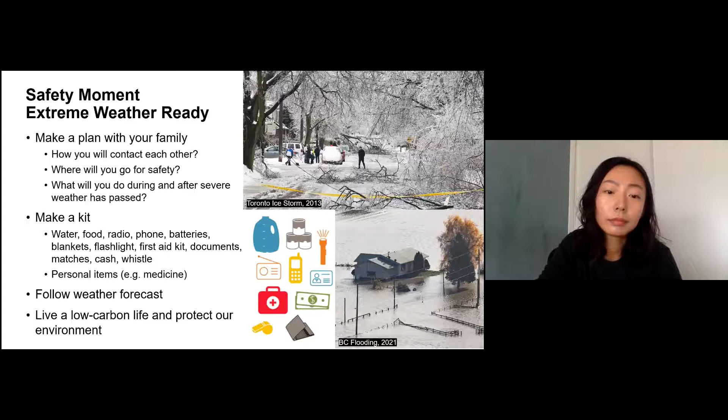Thanks, Yunfei. We also like to do inclusion, diversity, and equity moments at HDR. Today I want to quickly talk about pronouns, and you'll see that we are featuring them in the presentation. Pronouns are words that refer to either the people talking or someone or something being talked about, and gender pronouns specifically refer to people you are talking about. Why are these important? Pronouns are one of the ways we portray our identities, and you can't always tell what someone's gender pronouns are just by looking at them. So when someone asks you to use their gender pronouns, they're asking you to respect their identity. Ultimately, knowing and using someone's gender pronouns is a positive way to support the person you're engaging with.

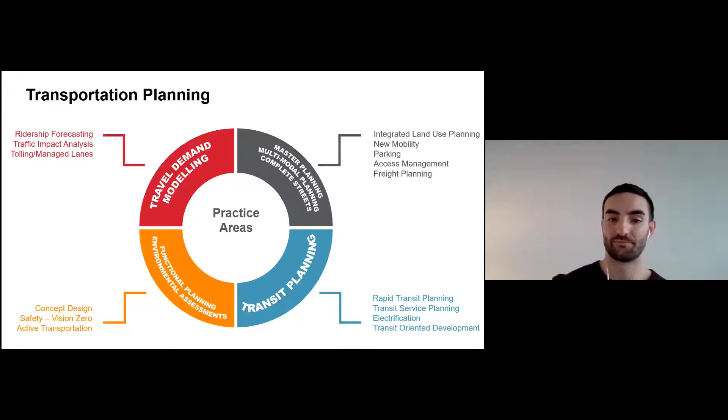Before we go into the four areas Nico just mentioned, this is really a golden era, at least the way we see it, for transportation planning, or just the transportation industry, and there are a couple of reasons. There's a lot of new technology happening — you can see e-scooters on the street, electric vehicles, autonomous vehicles, a lot of new areas of research. And I mentioned climate change earlier — a lot of the projects we do are looking at infrastructure resiliency, and I'm sure there's going to be a huge need for that. Also, the entire GTA region is growing really fast.

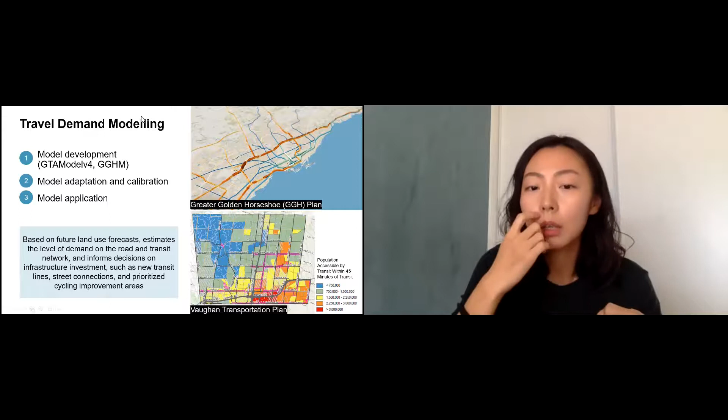Once we have a good understanding of the road and transit network's demand, we use that information to inform decisions—whether we want road widening projects, a new transit line, or to improve transit service on certain corridors. That then provides inputs to these improvements.

One thing I want to point out is when we look at the way we use models, we have to have critical thinking to understand what these demands actually mean. So if you look at a road network and the volume over capacity is over 1, which means it's congested, when we look at these numbers and look at improvements, we do not necessarily just say this will trigger widening projects. We can look at ways to improve transit, or prioritize some cycling facilities to offload the projected demand on the network.

Here are two applications of the model, shown in the pictures on the right. The first one is for the Golden Horseshoe plan, the GGH plan our team is working on and trying to wrap up. We used the province's GGH model and looked at the demand. What's shown on screen is the demand on the rapid transit network and also the highway network.

The bottom right is the Vaughan Transportation Plan, which I'll talk about in some later slides. For this one, we looked at travel times projected in the GTA model. The more blue areas are areas with poor transit accessibility, and the redder areas are zones with good transit accessibility.

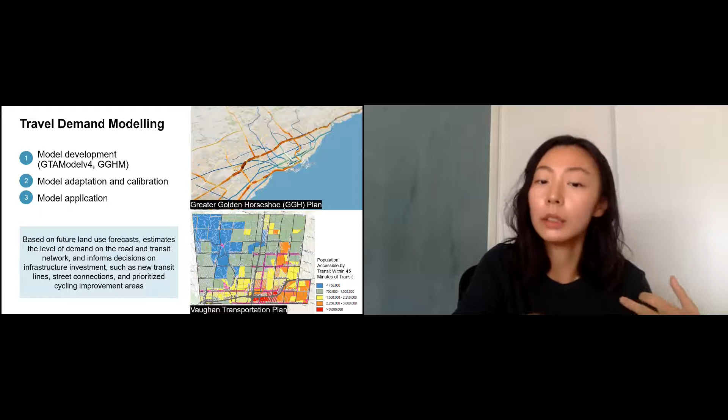So when we looked at that, we identified neighborhoods that may have poor accessibility to jobs, and some of the improvements we made based on this model projection were to improve local connections, either by improving transit headways or adding new transit services on the network.

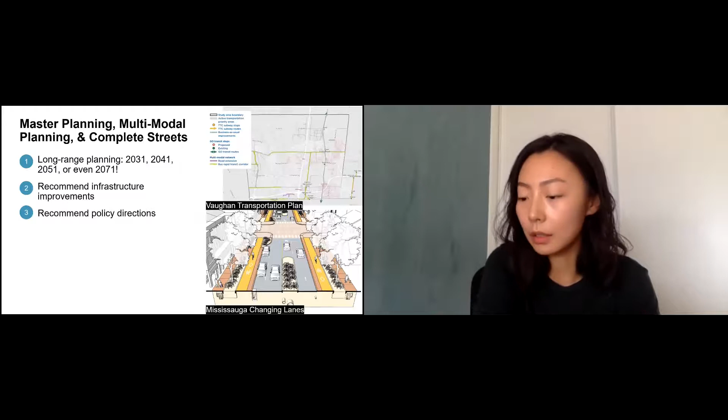So the first example I'm going to talk about is the Vaughan Transportation Plan, which is Vaughan's Transportation Master Plan. It's a strategic policy document that provides a framework and recommendations to guide future transportation-related studies, projects, initiatives, and decisions. There are three major components: first, establishing a vision with clear goals and objectives for how we want the city's transportation network to move in the future, in the 2041, 2051 horizon. Then we looked at existing conditions and projected future conditions, and based on that, we have a list of recommendations, actions, and policy directions.

So here are some samples of what we would recommend coming out of this transportation master plan. We proposed alternative solutions that can improve the city's network. For any transportation study, we usually have a business-as-usual network that looks at plans already in place, either city, region, or provincial, and look at what happens if we just keep going that way. Based on that, we provided new improvements in alternatives 1, 2, and 3. Alternative 1 is only road improvements, alternative 2 is only active transportation - walking, cycling, and transit improvements - and alternative 3 is a multi-modal alternative with a bit of road, AT, and transit improvements.

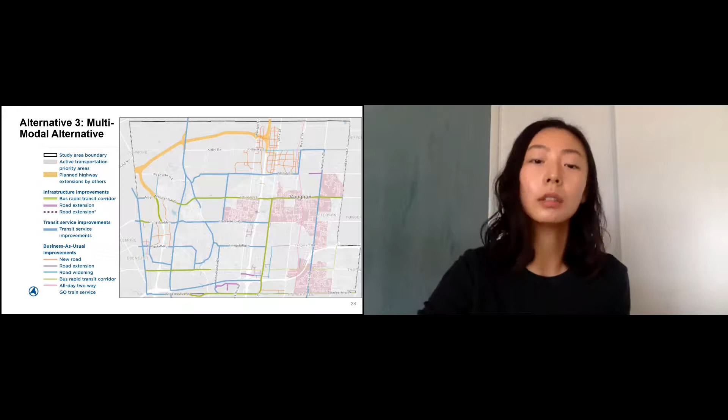Next slide, please. Policy directions is another big part of these transportation master plan projects. I have 3 examples on the screen that I personally find pretty interesting for our project. We're doing a lot more, but this gives you some ideas of what will come out of these transportation master plan projects.

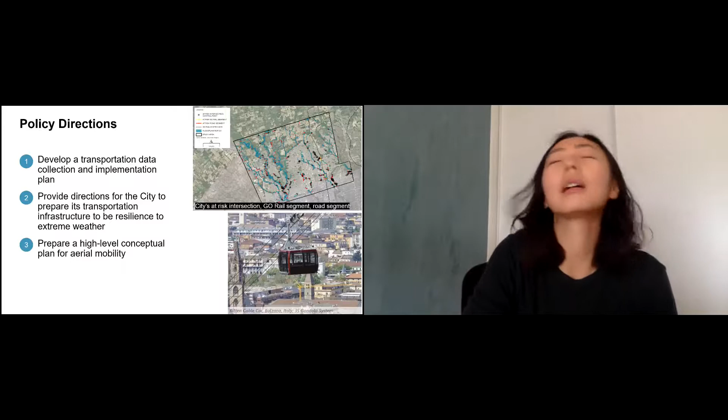The first one is we're developing a transportation data collection and implementation plan for the city. The city of Vaughan does not currently have an official data collection program. Based on our review and interviews with neighboring municipalities, we're providing recommendations on what areas you may want to look at and what technologies you may want to use for your data collection program.

The second one is a climate change resiliency paper we're working on. The map in the top right corner shows where we conducted weather and rainfall forecasts and floodplain projections for the future, in the 2051 or 2080 horizon. We looked at the city's infrastructure, like intersections, GO rails, or road segments that may be at risk, and provided recommendations to retrofit them now or design alternative solutions.

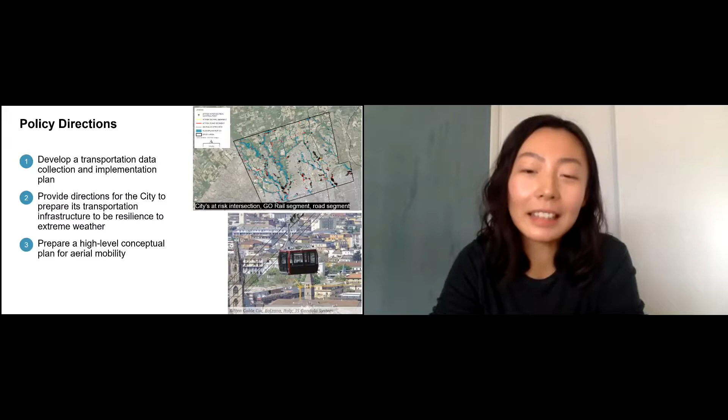In the future, when we propose any infrastructure at these potentially at-risk locations, climate change resilient design should be considered. The last one is pretty interesting: we're looking at a very high level conceptual plan for aerial mobility, potentially a gondola system. I want to caveat that this is a very high level conceptual design. When we prepared the proposal, we thought the city of Vaughan might be interested, and they were, so we're looking at this for a corridor of the city.

Next slide, please. The next example, or kind of project we do, is a complete street study. This one I have titled Mississauga Changing Lanes, which is how they refer to their complete street study, but the concept applies to all municipalities. The bottom line is, how can we design our streets so they're safe for users of all ages and abilities?

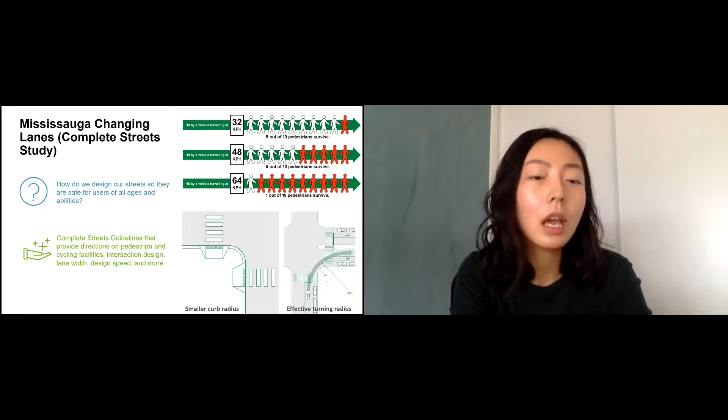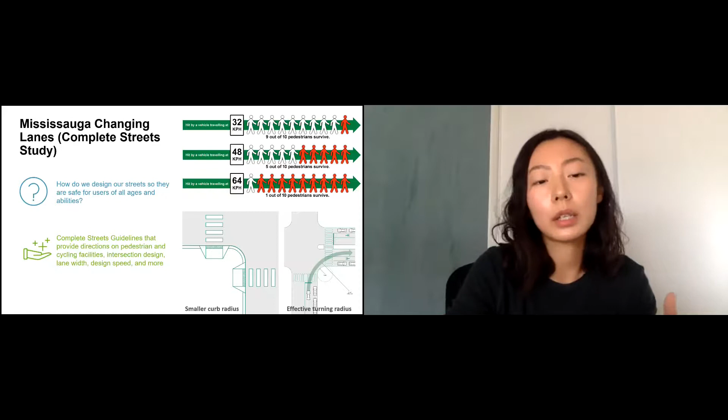This means people who walk, people on bikes, and children or seniors—all road users. For complete streets guidelines, we provide direction on how to design elements such as pedestrian and cycling infrastructure, intersection design, lane width recommendations, and design speed recommendations to help ensure infrastructure is safe for everyone.

Some examples of what we may do: the top right corner looks at if a vehicle is traveling at a certain speed and hits a pedestrian, what's the chance the pedestrian survives? At around 30 kilometers per hour, most pedestrians will survive. But if hit at 60 kilometers per hour, only 1 out of 10 pedestrians will survive.

So for a lot of these complete street studies, we're recommending the city reduce their design speed, how they design streets to make vehicles slow down, or change traffic calming measures or lane width elements to again make them slow down.

The bottom right shows 2 images on curb design. This is all related to making vehicles slow down and having pedestrians cross with less distance. Smaller curb radii force trucks or vehicles to slow down and look at people crossing the street. Another technique we recommend is using effective turning radius.

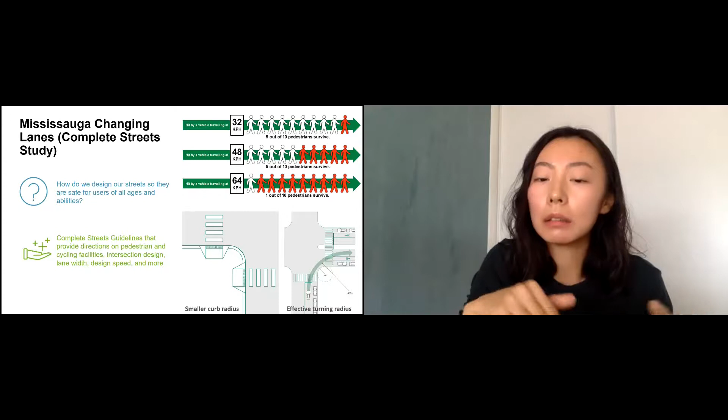Imagine a large vehicle like a big truck—it needs a bigger corner radius to make that turn. Instead of making the corner really wide, we allow for an effective turning radius movement, meaning they can turn not to the curb line but to the middle line in that same direction. This allows for a bigger curve while still maintaining the small curb radii that ensures the safety of pedestrians or vulnerable users.

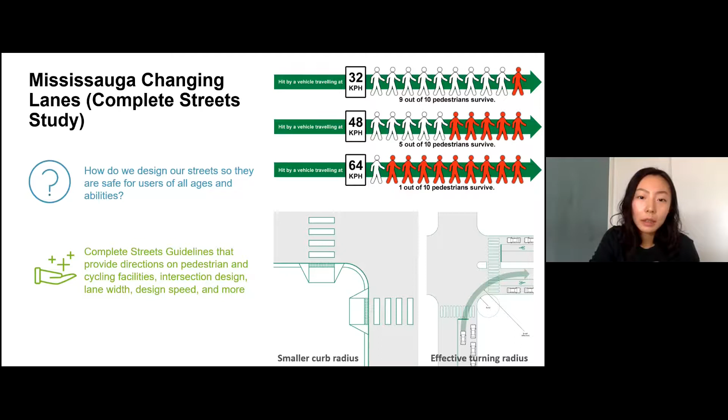So with that, I think that's the end of my part, and I'll pass it on to Nico to talk about transit planning. Thanks, Yunfei.

Just before I start this section, I want to note that even though we're categorizing these areas into 4 practice areas, they're so intertwined that every project has a component of one of them within it. So it's hard to talk about them in isolation.

Transit planning is a really broad umbrella that includes a number of different sub areas. Within transit planning, some of the things we do are related to service delivery, which includes scheduling. A lot of the work I do personally is around infrastructure planning of transit projects.

We also help clients develop plans for their fleet and how they can transition it. For example, right now a lot of clients are looking to transition their bus fleets to be completely emissions free, so looking at electrifying potentially.

We also do a lot of marketing and communication services. For example, when a region wants to introduce a bus rapid transit system that's completely new to the public, there needs to be a concerted effort to market, educate, and communicate what the benefits of that BRT system are going to be. So we can do that as well.

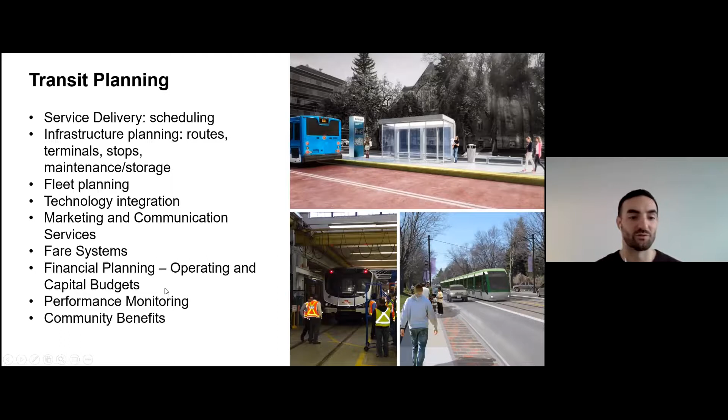One of the biggest projects that HDR currently has is the Ontario line. I wanted to quickly talk about our involvement from the early days of the project, where it all came from - the relief line, as it was referred to previously. I think it's been contemplated since 1910, so this project has been thought of for quite some time, but obviously it's 2021 and we're still on the road to getting it built.

HDR really got involved back before 2012, when we completed the downtown rapid transit expansion study for the city of Toronto. What that looked at was what is needed to solve the congestion issues we were seeing on the Yonge line, and also help serve some of the shoulder areas of downtown that weren't currently being served adequately by rapid transit.

Through that study, a number of different routes were identified, and a big part of the transit planning process is not just drawing lines on maps, but evaluating them from a multi-criteria perspective - looking at things like ridership, but also who you're serving, equity, environmental impacts, how much congestion relief you're providing, and the overall societal benefit the line will have.

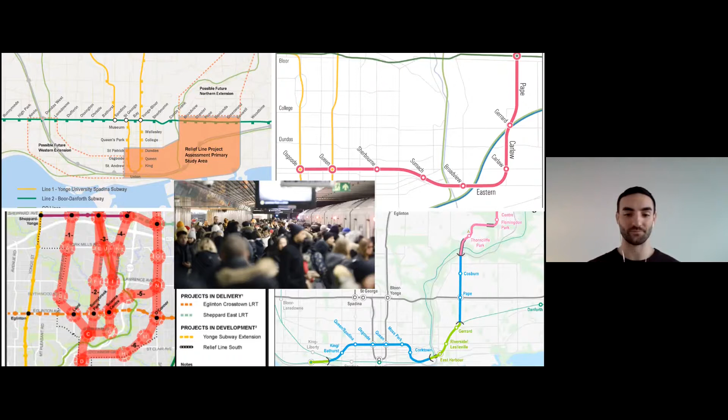Some of the other work that we do is around conventional bus and bus rapid transit systems. So again, doing more with less here. A lot of our clients, especially in the US, but also here in Canada, are thinking, okay, maybe we don't have enough funds or ridership, population and employment density to build subway or metro lines, but how can we provide more reliability and frequency for people traveling with a bus network? And so we see a lot of bus rapid transit systems proliferating, and we help them do service plans, and our transit architects help us design these really beautiful stations that have more passenger amenities than just a typical bus stop. So they could be fully enclosed. They can have heating with them. There's real-time information at these stops and accessibility features.

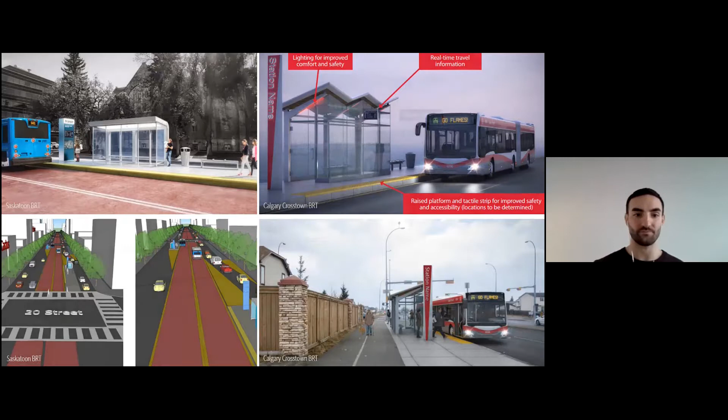I know we only have 10 minutes, so I'm going to power through this one. Another project that I'm working on is the extension of the Hurontario LRT into the city of Brampton. Similar to the Relief Line and the Ontario Line, it has a storied past. Basically, it was contemplated in 2010. Unfortunately, the city of Brampton in 2015 canceled a portion of the route that was going through the downtown. And so HDR was brought on to look at alternative ways to get to the downtown in 2017. And currently the project was rescoped in 2019 to look at evaluating the trade-offs between a surface LRT and an underground LRT.

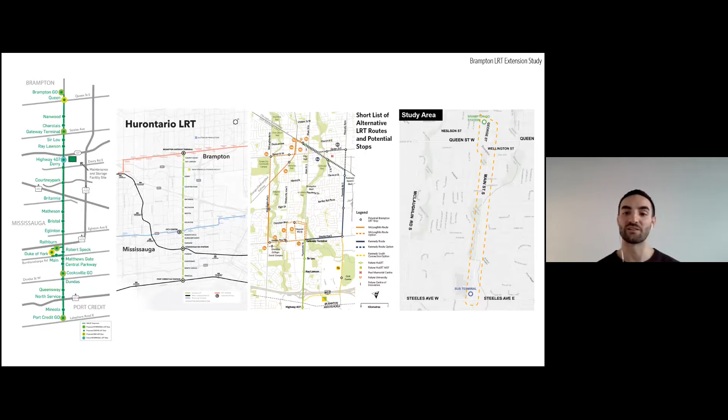Something that I find myself doing in my job a lot is helping clients make these very large decisions. Something that we do really well is use business case frameworks to evaluate these projects and look at the strategic benefit, but then weigh that against the economic and financial impacts. That's what we've done with Brampton. The project is currently unfunded, so it'll be interesting to see what happens next there.

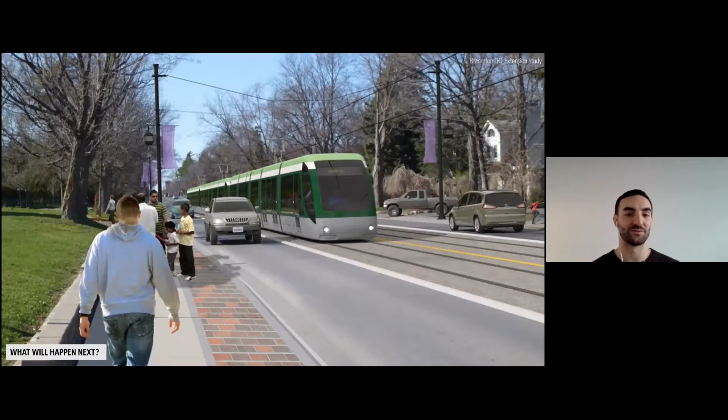Our last area is functional planning and environmental assessment. All I wanted to say here was that all of these projects usually do not live in isolation, they're not just a research project where you can go off and spend years figuring out the answer just with your project team alone. They're usually part of a government mandated process. So in Ontario, one that we typically follow is called the municipal class environmental assessment process, but there's a number of other processes that could be undertaken depending on the type of project.

The point of this is really that there are review periods that you have to abide by with agencies, but also the public. And this is also where you get to take into account design. So we talked a lot about the planning side, but part of planning is determining feasibility of fit. So it's nice to draw a line on a map, but how is that actually going to play out in the real world? What are the impacts going to be?

Are you going to need to widen a right of way? Are you going to need to impact someone's property or remove a driveway or cut down trees? So all of these need to be assessed. You need to figure out what the impacts are going to be, and then you need to figure out a mitigation plan of how you're going to deal with that. So that's a big part of the work that we do.

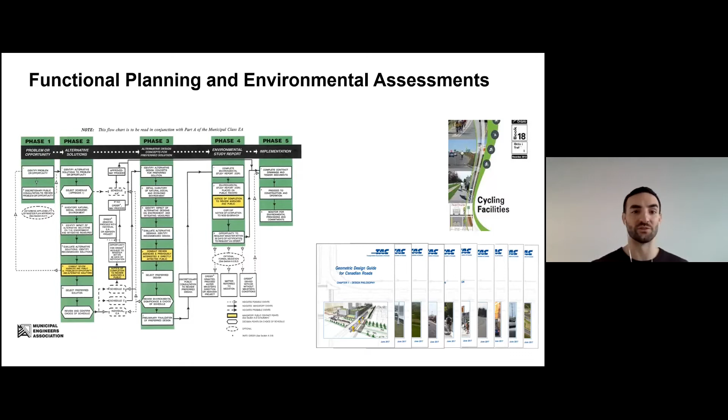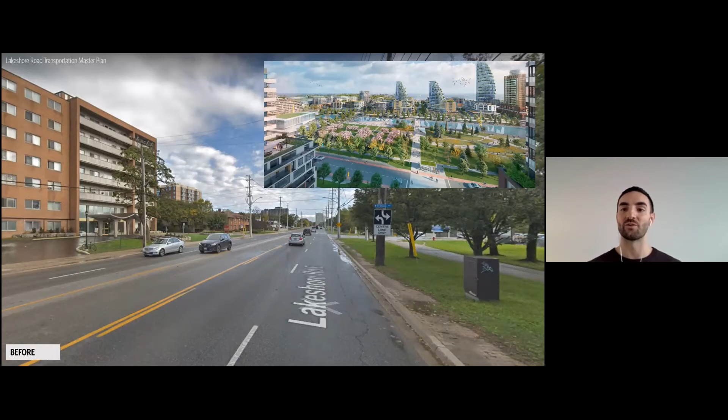One of the projects that I'm working on where we're doing this is for the city of Mississauga on Lakeshore Road. So looking at converting this street, which doesn't look very appealing at the moment, and trying to achieve the goals and objectives of the city, shown in that top right-hand corner, for what they want to see for their waterfront. So we did a functional planning and environmental assessment process to look at incorporating bus rapid transit onto Lakeshore Road. This is just showing you here at a planning level, the type of design work that we would do, laying it out, determining a cross section, and then seeing what the impacts would be on the area.

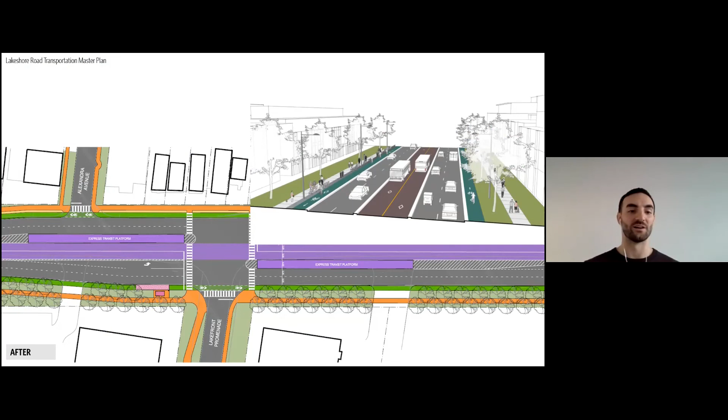Okay, so I wanted to leave some time for questions.